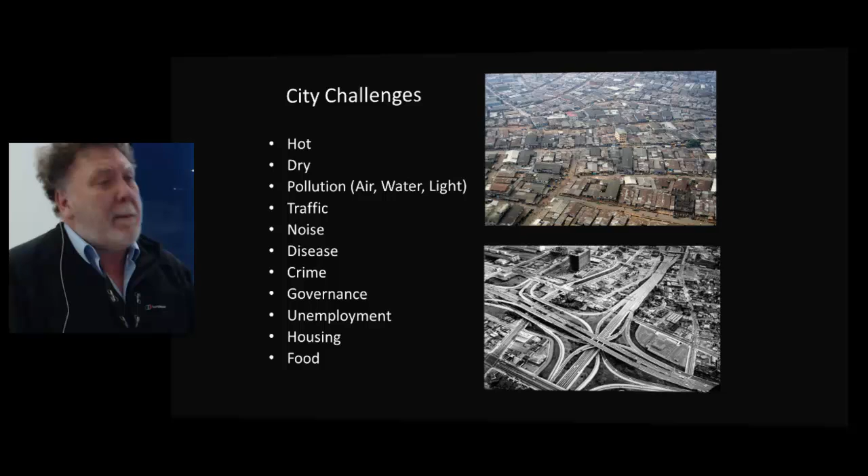We've also, of course, got this problem of climate change, which is still being ignored by too many people, and that means that we have more drought and more extreme weather, heavier rainfall, and that means that we need to really think about how our underground city will help us to cope with that.

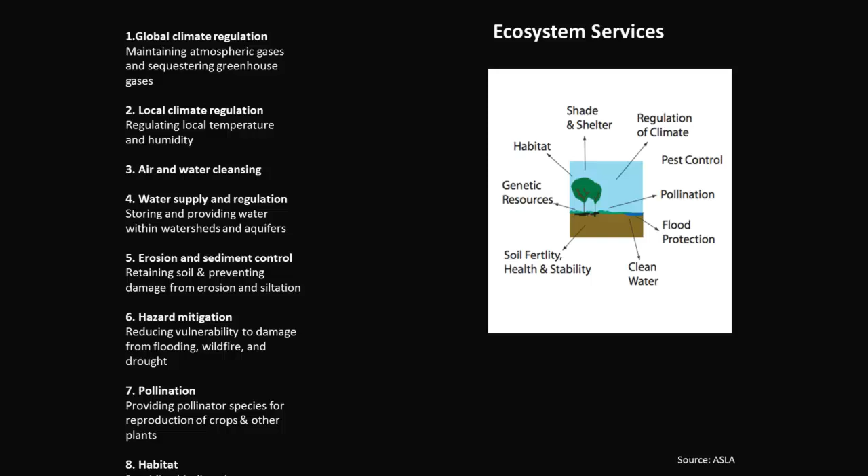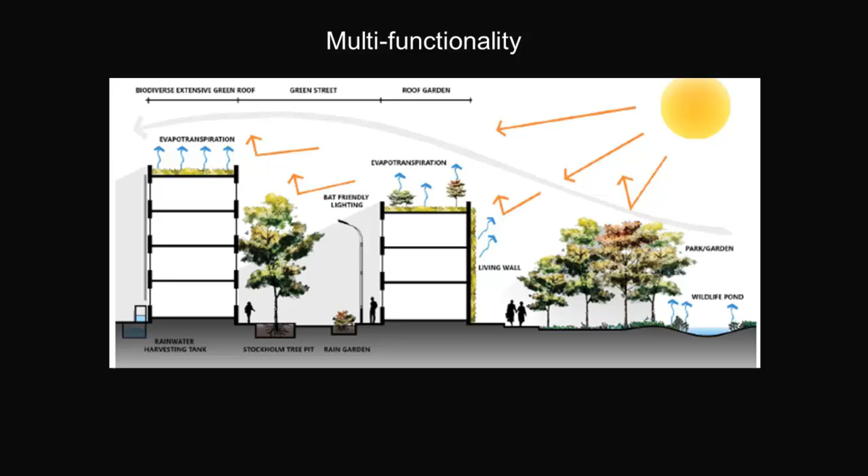And of course, the other really helpful concept is this idea of ecosystem services. So these are the benefits that we get from nature free of charge, which are, if you like, a side effect of bringing more soil and vegetation and water into the city. But it's a helpful language, and there's a lot of academic research in ecosystem services if you're interested in the detail of that. And the other really important concept is multifunctionality. So we need to make sure that all the interventions that we have work together to bring us the whole range of ecosystem services.

So I want to now go into this idea of the water-sensitive city. So the water-sensitive city and water-sensitive urban design is an idea that's come out of Australia, which looks at the water cycle in the city. So it's not just about drainage, which of course is very important, but also about reducing the amount of water that we consume, which is extracted from the wider environment. So it's looking at reducing the consumption of potable water, it's about recycling water, and it's about sustainable drainage as well. So I'm just going to look at a few important concepts here.

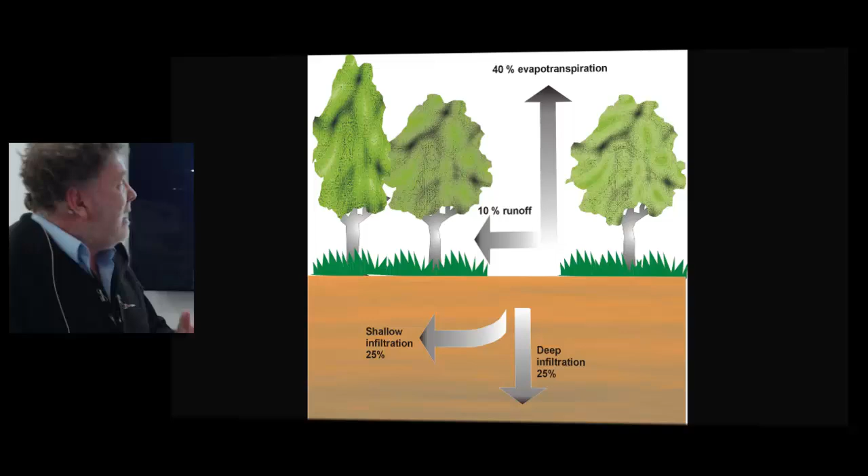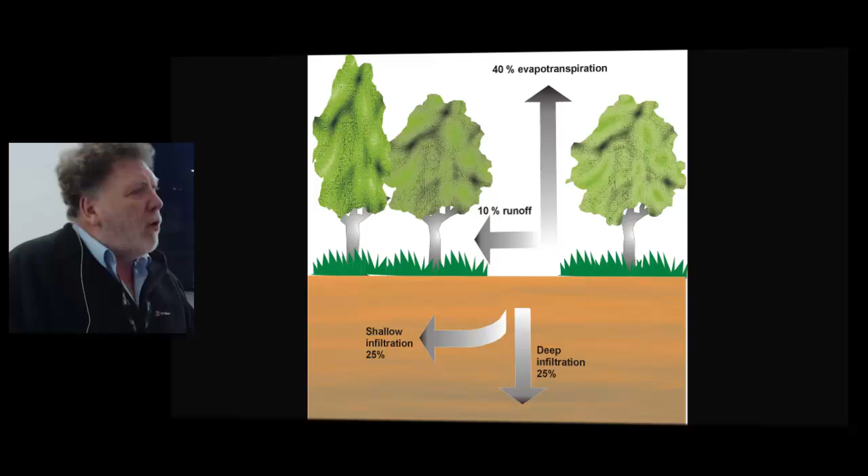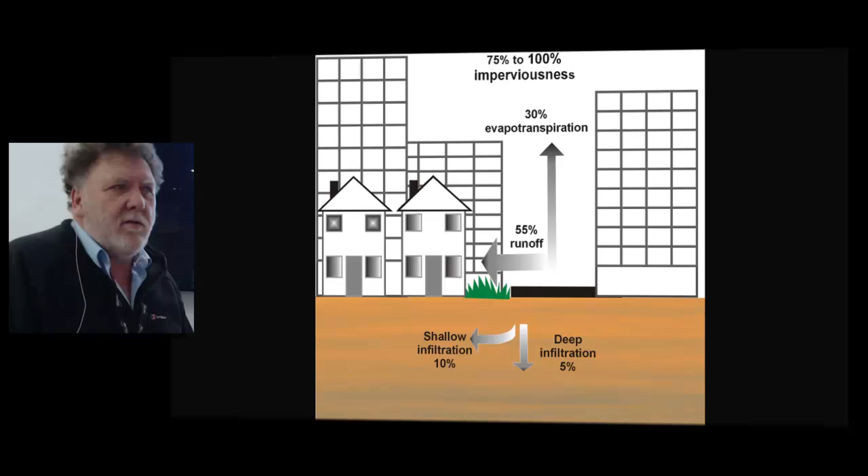So in the wider environment, you'll find that a lot of the rain that lands infiltrates, and that's typically about half of the rain that lands on the city. And of course, some of it's transpired as well, so that's very important. Not what we're talking about today, but evapotranspiration is very important. And in the greenfield environment, a relatively small amount of that water runs off. But in the town, because of the impermeable surfaces, the sealed surfaces, you'll find that the infiltration rates are much reduced, and evapotranspiration is reduced, and runoff is increased.

And that runoff is a real problem because it means that water is polluted, so it's polluting the downstream water courses, but also it's sending water rapidly downstream through pipes and water courses to cause flooding. So we need to rediscover our underground in order to increase that infiltration rate. And another way of looking at it is to go from a linear process to a more circular process.

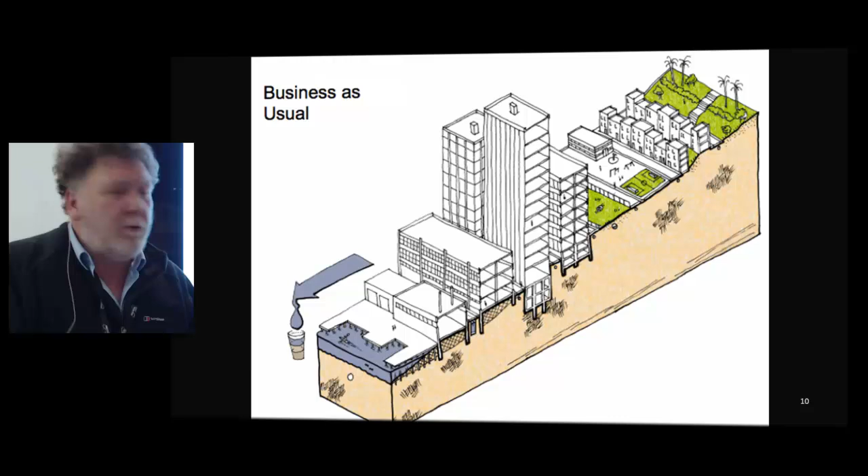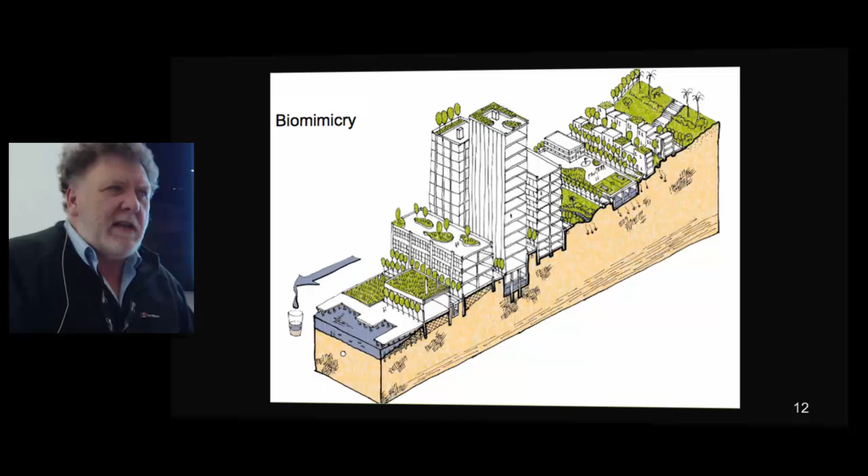And yet another way of looking at this: business as usual means that we have all these sealed surfaces. We've got rid of too much of our soil. We've sealed things off. We need to mimic nature. Of course, if we mimic nature exactly, we don't have a town. So what that means is that we're de-paving, and where rivers have been put into pipes, we're bringing them to the surface. The Americans call that daylighting rivers. We're bringing in green roofs, we're harvesting rainwater. But today, a lot of it is about de-paving and the quality of that soil that is exposed.

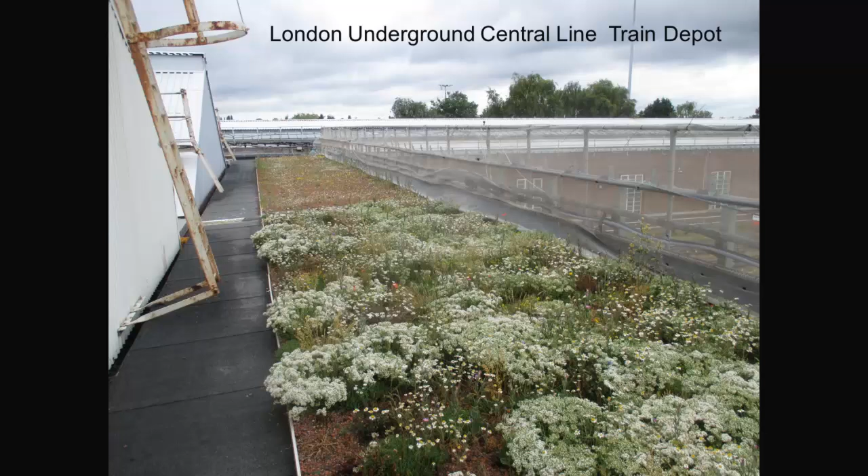So just very rapidly, before we look underground, we'll bear in mind, of course, that we can put soil on buildings and we can hold a lot of rainfall on buildings. So this is a London Underground train shed, which causes flooding. And so London Underground wanted to use green roofs to hold a certain amount of rainfall. And so they've been measuring that with the University of East London. By the way, it's work that's been done for more than 30 years in Germany, but in England, people are determined to repeat that research to check it. And of course, we can intercept downpipes, very simple.

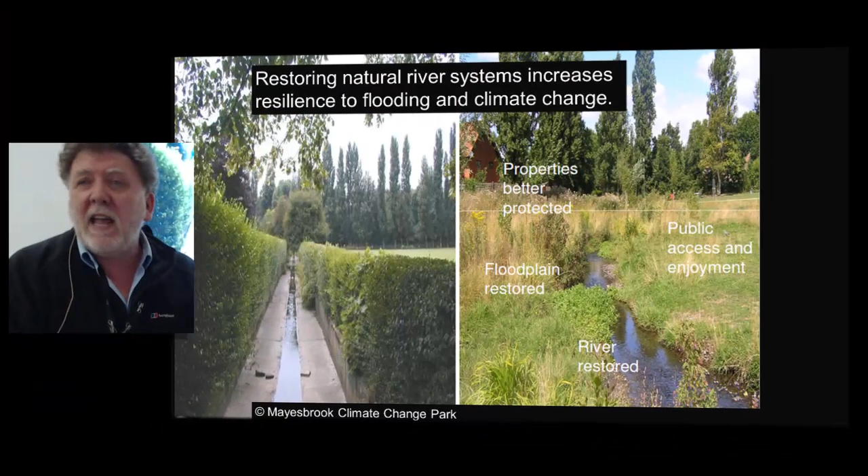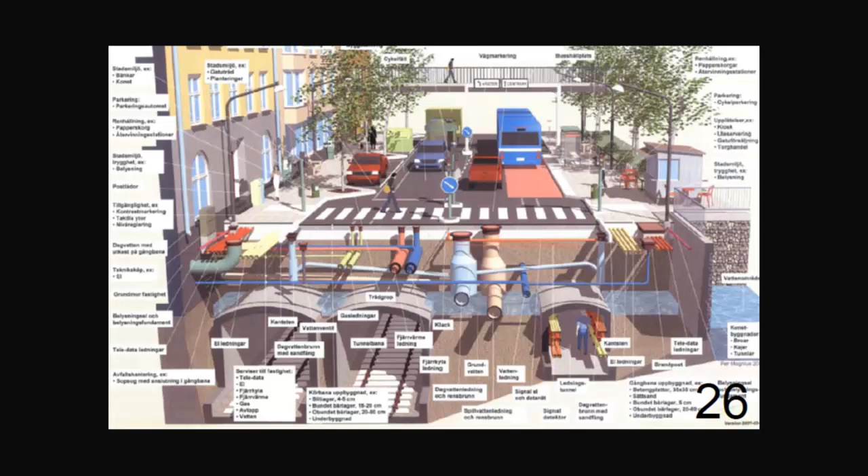And as I said before, we can daylight streams, or if they've been canalized, you know, that's not satisfactory. We can do this. This is in southeast London. So, okay, underground, people will often say, well, if we do depave, then we've still got a problem. It's crowded underground, and people will say, well, actually, it's too difficult.

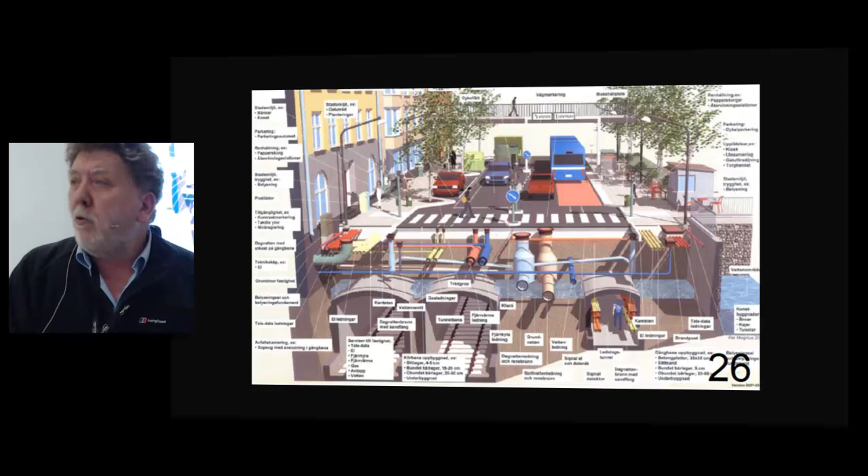But remember that plants and vegetation and drainage is actually, for the most part, about a very shallow part of the underground. So there's something we can do there. And you'll often hear as well that in places where the geology is impermeable, so for instance, in London, there's a lot of clay, people will often argue, well, there's nothing we can do because it's impermeable.

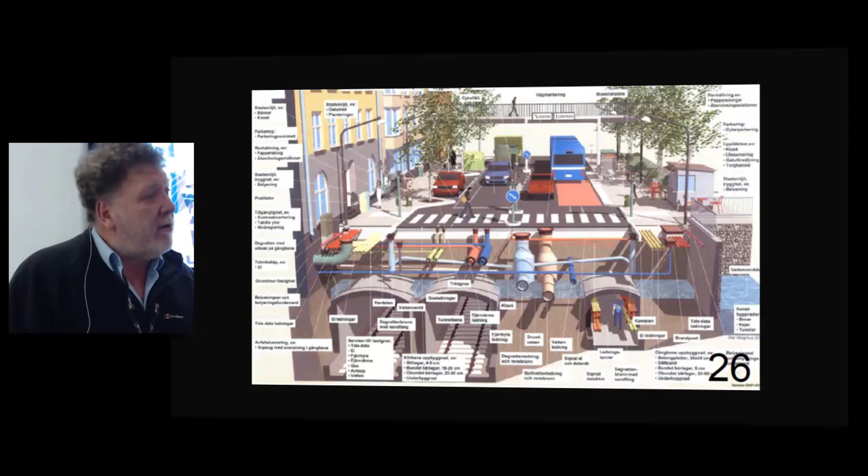But of course, remember that the natural clay is not the only material. There's a lot of made ground, and we can replace soils with free draining soils if we wish. So there's a lot that we can do. Now, trees suffer. So we tend to put a small tree in a small pit, and we hope that the tree finds water. And yes, trees do find water. They usually find it in a sewer.

So whenever you dig up a sewer, you'll find tree roots force their way into the sewer because the underground environment is so harsh. But our colleagues in places in Germany, and this is in Sweden, they will refurbish the soil. So when they're refurbishing a street, they will vacuum the existing soil away, leaving the tree roots, and they will dig out the ground and they will replace it in Sweden with a stony material, and they'll wash a soil which is suitable for the trees between those layers.

Now, these structural soils can take the weight of paving and vehicles. So you have an option. You've created a large permeable void under the pavement. The services are nicely wrapped up in whatever protective material is required. And so that is a sustainable drainage system, if you like, which can store a lot of water. It can infiltrate and clean water.

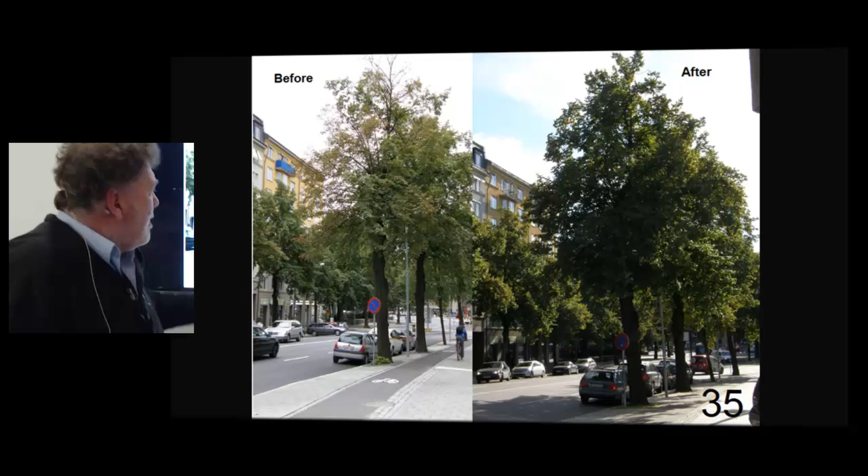But as I say, you can pave over this. Or you can leave it open and top it up with soil as a planter. So this is what they do in Sweden. So you can have a tree that's been stressed, and then when you've refurbished with these technical soils, the tree's recovered within a year. You're reducing flood risk. And so this is something that can easily be done. It's not being done in the UK routinely, but it's something that we need to learn.

And of course, there are other ways of doing this. So our American colleagues have these suspended pavements where they're using plastic boxes and free draining yet water absorbent soils, which can take the weight of paving and vehicles, but they give the space for the tree roots to spread. And there are people here supplying these products if you want to know more about the detail.

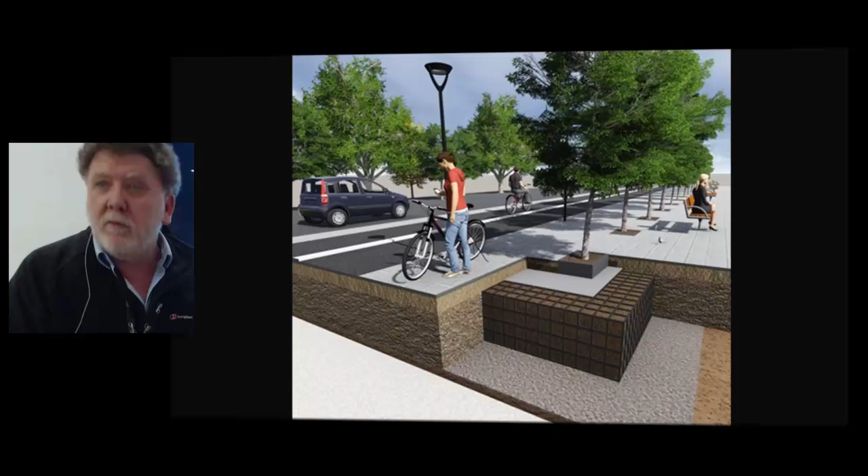And so the tree is much happier there. It's not seeking to steal water from the sewer. Of course, we can never guarantee that a tree won't do that, but we can make its life underground much happier. Another thing we can do when we depave, we can excavate the soil and replace it with a mixture of sand and composted material as a rain garden.

And what's interesting about this kind of intervention is that money that, for instance, might be earmarked for something like traffic calming can be used for greening. So we're traffic calming, we're greening, we're increasing the amount of permeable material to reduce flood risk. And we can do a lot of simple things. We can make cuts in curbs, we can lower beds, we can excavate soil and replace it.

And you know, a lot of this can be a whole swarm of very small interventions all over the place, which on their own may not amount to very much, but collectively will start to transform the city. So instead of having a downpipe issuing into a blocked drain, we can issue into a rain garden. And of course, we unblock the drain so that when the rain garden fills, it can overflow into that. So I hope I've given you a good introduction to some of the issues here.